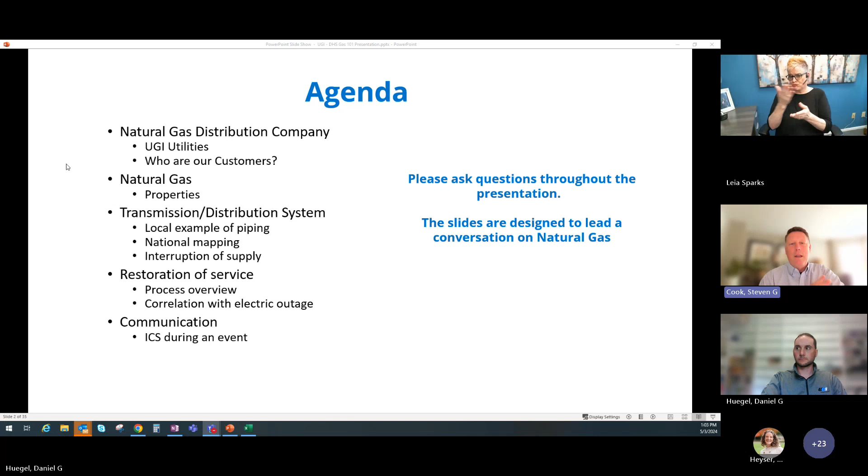Okay, so the agenda for today. Natural gas distribution company: who we are, UGI, and who our customers are. Some properties of natural gas, the basics. Dan will cover the transmission and distribution system, the restoration of gas service, an important part of it, and then, of course, communications during an event. So, Dan, if you wouldn't mind, thank you.

Over the past 3 years, natural gas utilities have added, on average, 750,000 customers annually. About 60%, maybe 61%, of U.S. homes use natural gas for some type of end use. That translates out to one new customer every minute across the United States, 80 businesses each day. At UGI, we add one customer every 45 minutes. Not quite every minute, but every 45 minutes, every day, 365. So again, we continue to add customers.

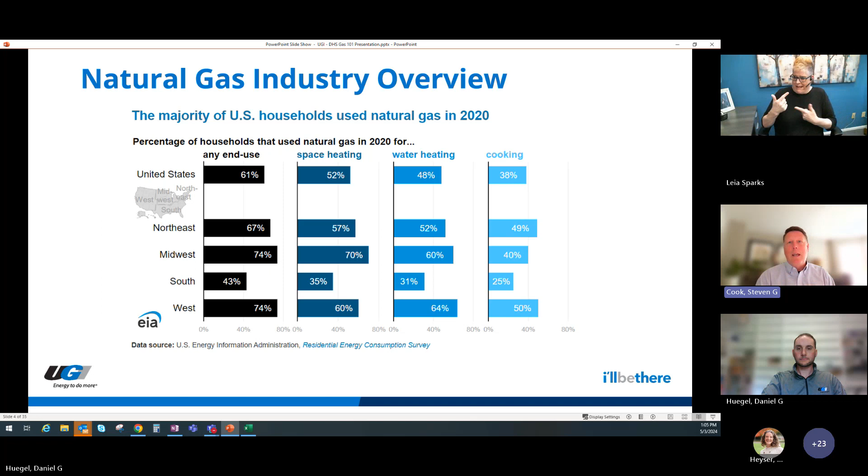Moving on. This gives you a general idea. This shows the majority of households use natural gas in 2020. What's interesting is it shows 61% of US households use natural gas. But remember, that's only where natural gas is available, and it's not available everywhere. Because we're not bottled like propane, or in a vessel like oil, or electricity, which serves everyone, where we are, we have even higher concentrations of natural gas. So in outage events, the majority of homes along our gas distribution systems use natural gas. All right, Dan, next slide.

So what I'm going to try not to do today is use a lot of acronyms. Okay. But I have to use one because this is something you'll hear fairly often.

It's NGDC, and that stands for Natural Gas Distribution Company. So in an event, you'll hear this, Derek, our friends at the PUC use this term a lot, and it really represents a state regulated natural gas utility, which owns the gas lines and equipment necessary to deliver natural gas. So when I say regulated, that means the Pennsylvania Public Utility Commission regulates us, UGI, as well as 20 other natural gas utilities in the state of Pennsylvania.

So they oversee us, they make sure we're doing all the proper things, and we report back into the Public Utility Commission. Now, what's also interesting is, oh, you got ahead of me, Dan. What's also interesting is that as an NGDC, we have specific service territories. So we apply for certificates of public convenience, which means we ask the Public Utility Commission, can we serve a municipality?

And why that's important is, while it's not always the case, it's predominantly the case, one natural gas company serves each municipality. So what you don't have is multiple gas lines running throughout an area. So in the case of an event, generally you're dealing with one natural gas company. If it's very large, it could cross territories, but the territory is well known. So you'll be working with one or multiple companies, but it's clearly defined. All right, next slide, Dan.

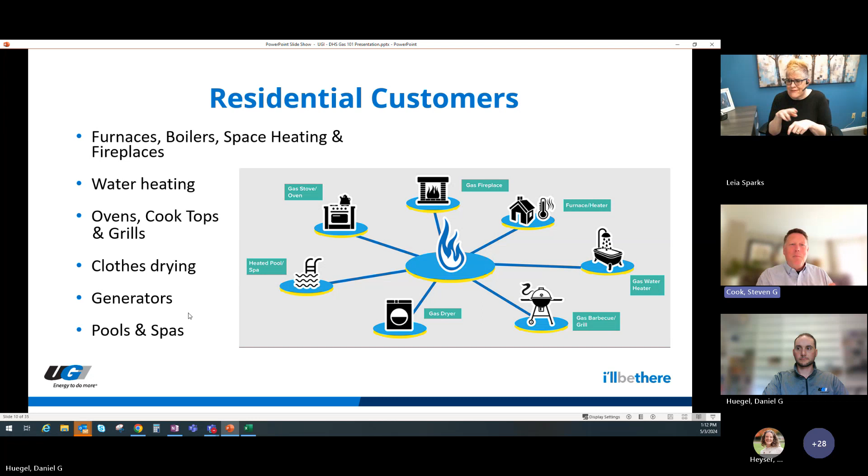I just want to bring that up to this group, that there's very few pieces of equipment that are just standalone. There are some pilot operated natural gas water heaters that are natural draft, but they're becoming less and less as we go along. So most equipment requires power.

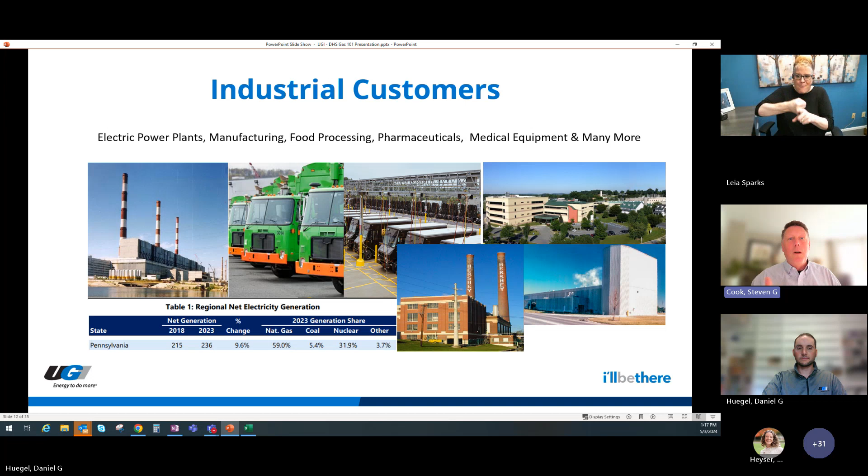All right, Dan. So, natural gas. Properties of natural gas. Tasteless. I'm not sure why you'd taste natural gas or why you'd taste gases, but anyway, it's tasteless and it's colorless, okay? It's actually odorless too. The distribution companies add an odorant to the gas.

It's called mercaptan, and it's what makes it smell like rotten eggs, and that's just so that the public can be aware if there's a gas leak; they can smell that sulfur or rotten egg kind of smell. Something else is natural gas is not toxic. What is concerning though is if there's enough natural gas in a room, it could displace oxygen.

So, sorry, someone's knocking at my door.

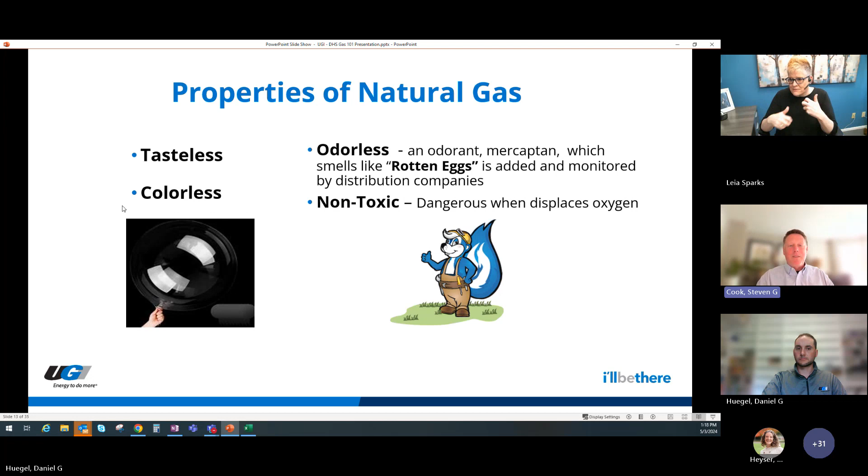So it displaces oxygen. So obviously that's a problem if it displaces too much oxygen. Now, another property of natural gas is specific gravity, and this is important to know. Natural gas is lighter than air, so it has a specific gravity of 0.6, which is really the ratio of a gas density to air. So when it's less than 1, it's lighter than air.

For example, propane, another gas that's oftentimes confused with natural gas, has a specific gravity of 1.6, which means it's more dense than air. So why I say that is natural gas rises, and when ventilating, we ventilate natural gas through natural methods, and what we do is use, help me out, Dan, I guess like fans and whatnot to displace or dilute propane from an area.

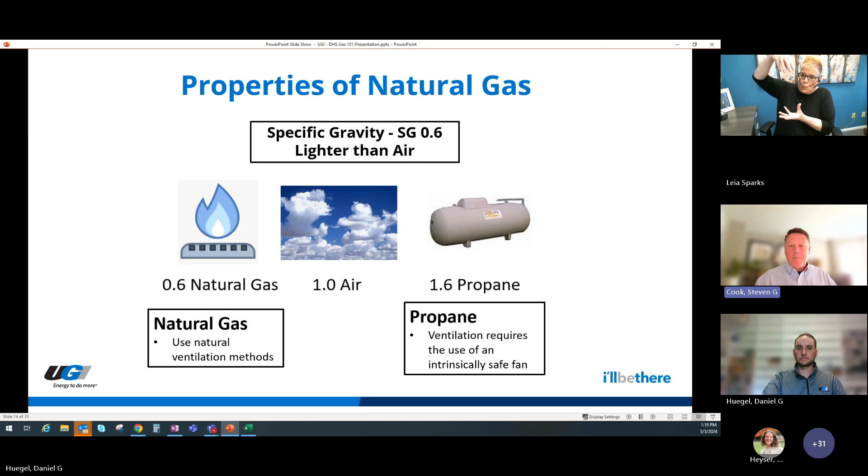All right, this is more the chemical composition of natural gas. The primary component of natural gas is methane, CH4. When properly combusted, the byproducts of combustion are carbon dioxide and water. Also, another property is it has an ignition temperature of roughly 1100 to 1200 degrees. So the source of ignition has to be fairly hot.

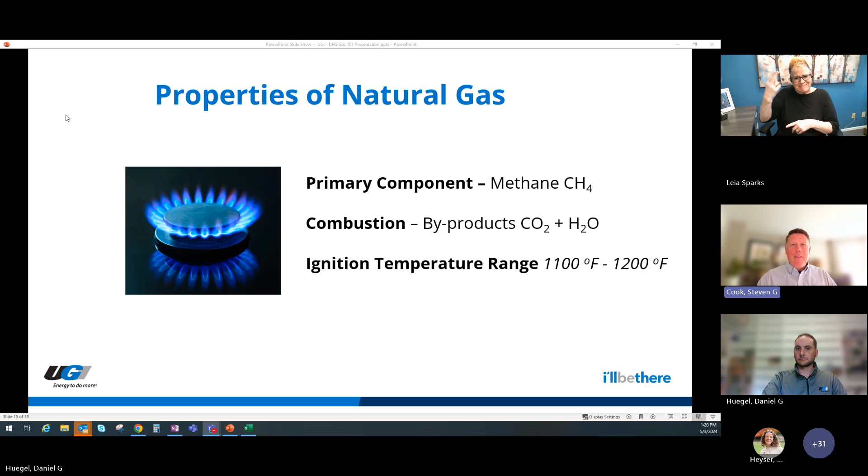Now, I say this, if we go on to the next slide here, because there's a very specific and narrow range in which natural gas will ignite. A lot of folks don't know this, okay? It's really about a 10% range. In fact, there are 3 components required for ignition: natural gas, oxygen, and a source of ignition.

So if it's too lean, which means less than 5% natural gas mixed in a room with air, natural gas won't ignite. Remember, you need to have between a 5 and 15% ratio of natural gas with air. You need to have air there, oxygen, and you need to have a source of ignition. Only when those 3 are together can you have ignition. Too much, above 15%, you won't have ignition. So again, hopefully you guys find that important.

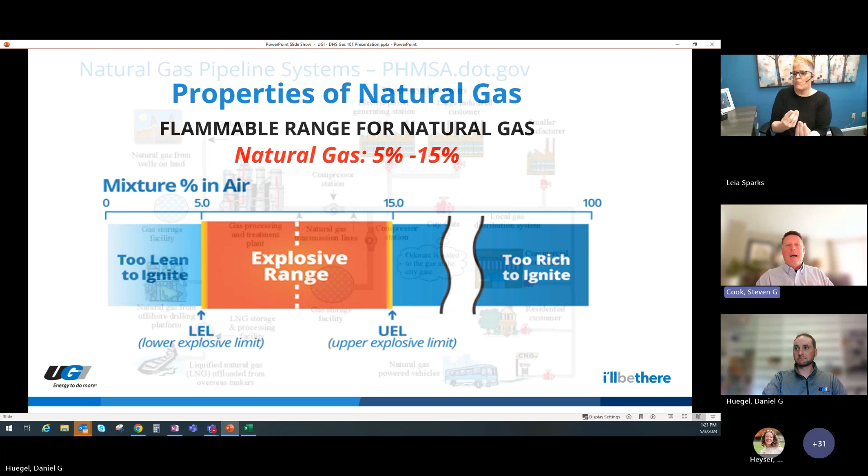That's why sometimes you've got your gas grill, and you try to light it, and it doesn't light because you don't have that right combination. Anyway, next slide. I think we're getting to Dan's slides now. So I'll turn it over to Dan.

Thanks, Steve. So I wanted to give an overview of natural gas pipeline systems, and I took this diagram from PHMSA, from the Department of Transportation, and the PUC acts on PHMSA's behalf to enforce the regulations. PHMSA shows this overall diagram of natural gas pipe systems. So we start on the left-hand side and we see where natural gas comes from.

Typically, it's derived from wells that are drilled down, maybe even a mile or 2 underground, and they bring up the natural gas. They can store it in storage facilities. They do some of the drilling for natural gas offshore. A lot of it comes from the Gulf of Mexico region.

And then they also can bring in liquefied natural gas. You can cool the gas till it goes into a liquid form, and they can ship it in tankers, or they have LNG storage facilities as well, big tanks that you may see along the highway, and they will be able to vaporize that gas and put it into the piping systems.

So typically they will process the natural gas when it's coming out of the ground, and they're pulling the different types of gases that are blended with it, like propane or butane, other heavy hydrocarbon type gases, till it gets to a pipeline quality natural gas. A lot of times what they will do is then compress the gas to get it at a higher pressure to be able to flow through the pipelines and supply the areas that are looking to be served with natural

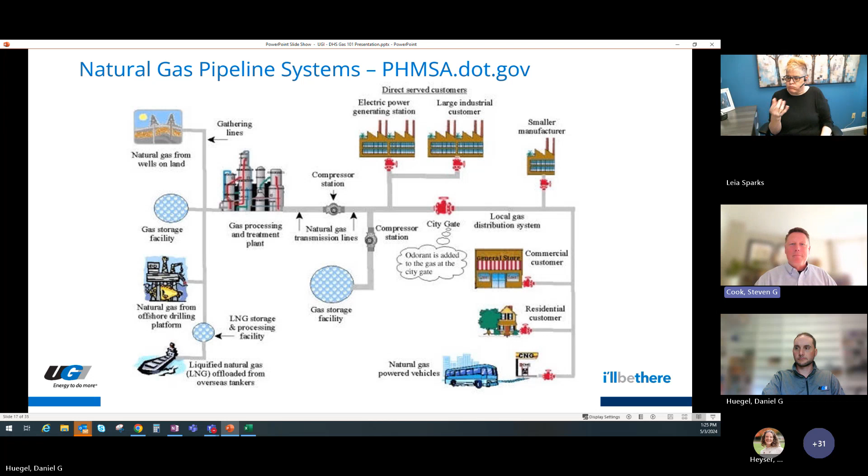Thanks, Steve. And so natural gas supply considerations. Again, this information will be available, but the point of this is system reliability. Many of the gas lines going across the country and locally, our distribution system has multiple points that it's connected to. And we do have some single one-way feeds that if you have a disruption on the pipeline, everybody downstream of that line is going to be affected.

You have other circumstances where you have multiple pipes coming into a network. So if you have a local disruption, it doesn't affect the rest of the distribution territory. You can backfeed it through other pipes and be able to maintain some reliability of supply. You may have a localized outage, you have to shut off some local valves to isolate a situation, but you don't lose the whole service territory.

Now, that's also dependent on the lines that are involved in an incident or outage. You may have somebody that digs in and hits a line and you have a gas emergency, or you have a leak where you have to shut the line down. In those circumstances, it could be just a local line that's going to a dead end cul-de-sac, and you may affect a handful of customers, or it could be a main trunk line, high pressure line that's affecting hundreds, if not

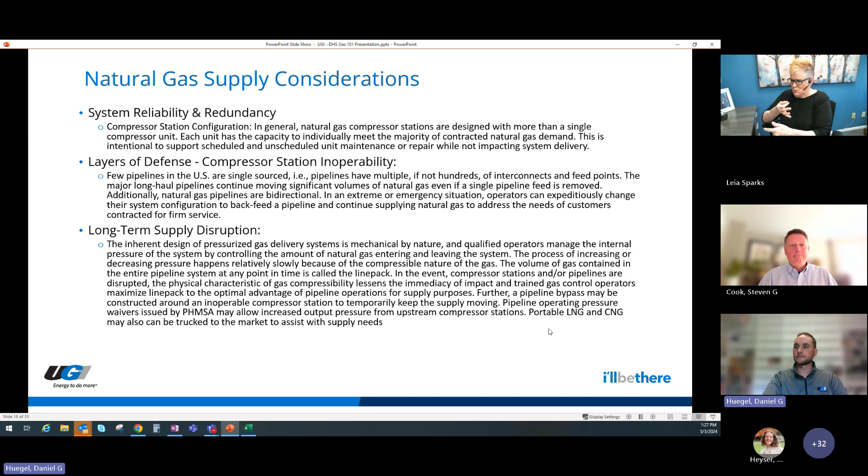So we break down the big picture view of gas facilities into kind of 3 categories. The first we'll get into is transmission and gathering pipelines. Then we'll talk about our distribution mains. Mains is a term we use for pipelines. And then customer service lines and meters.

So transmission facilities, these transport gas. Historically, most of the gas in the country came from the Gulf of Mexico region, Texas, Louisiana, big producers of natural gas. But many of you should be aware, especially in the last decade, of the Marcellus Shale. It's a rock formation, and it comes across a large part of Pennsylvania, and they found large deposits of gas. The drilling technology has advanced, and they could actually drill down 1 mile into the ground and harvest this gas. And most of the gas that we use regionally in the Northeast is supplied right from Pennsylvania, right from the Marcellus gas regions that we have.

So these transmission and gathering lines are gathering the gas from these different drill sites and wells, and they'll compress them. And then they go through what we call a transmission line. And there's transmission operators and companies that have interstate pipelines that go to the country and the city centers where we're at. These go up to typically maybe up to 1,440 pounds of pressure for natural gas.

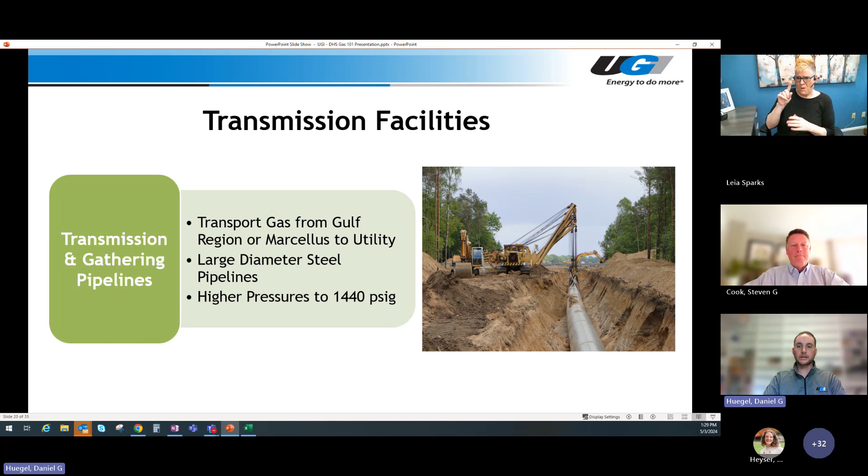There is a public national pipeline mapping system. The website is listed below here. And this is just an example. It actually goes by county, and you can select different variables on map layers to turn on. So an example here, we have up in the Stroudsburg, Mount Pocono area that we're showing, and we selected gas transmission lines or hazardous liquid pipelines. Those aren't ours, but they are part of this national mapping system. So you can see that there are some high pressure main trunk lines of gas transmission that traverse across the county here.

And again, this is public information. We're required as a utility to report annually on our transmission lines that we operate. But largely, it's the larger transmission companies that have the bulk of the high pressure transmission lines that go across the territory. So this should be a good resource if anybody's curious to use this, if you do have an outage and it's gas related, or you have LNG, liquefied natural gas plants, and some other interesting map layers that they have on this national pipeline mapping system.

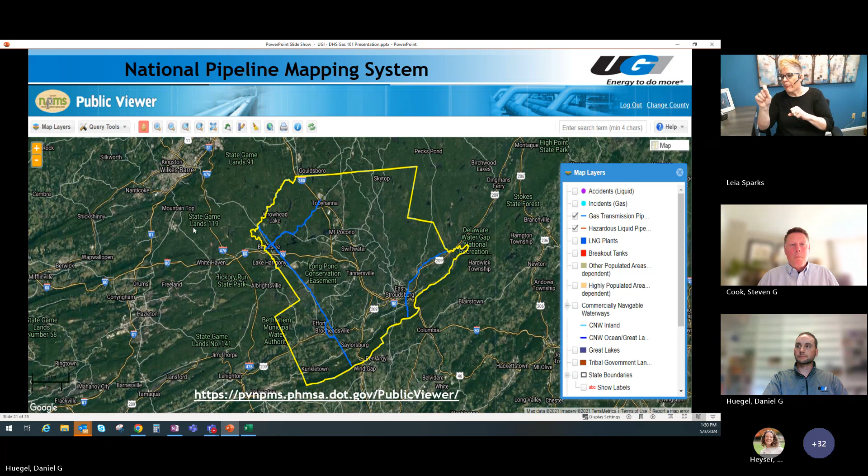All right, next, I mentioned earlier on the PHMSA diagram, the city gate stations. This is a pressure regulating station. It takes it down from those high pressure lines, and it puts it into a lower pressure that we use in our gas distribution. And it helps feed the main trunk lines that we have of our distribution system. So you may see these across the road, where you're driving, you'll see a bunch of pipes sticking out of the ground and other equipment. This is a heater that heats the gas up, because when you're reducing the pressure, it naturally cools the gas. And you have other equipment and monitoring equipment here. We meter the gas, so we'll purchase it from the transmission companies and then sell it to our customers.

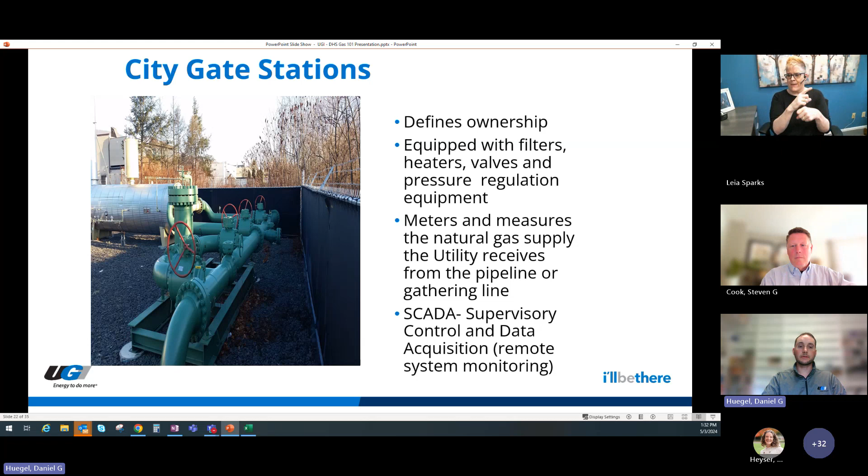So I wanted to highlight here, this is pretty complex piping systems, and there's valving and there's components here that we monitor. And if it is a large disruption on a transmission line and an outage, we're going to have to physically visit these stations and maybe manipulate some of the valves and monitor the pressures and do what we need to do to try to keep our system in play, or shut the system down and isolate it if we're going to be losing pressure.

Next, we have our distribution facilities. These are distribution mains and regulator stations. We distribute our gas across our service territory. Often they follow roadways, just local, state highways, all the way into neighborhoods. Our lines typically follow the roadways, but not always. Sometimes going from one territory to another. Steve showed that we have a pretty wide footprint, and a lot of our footprint is connected. So you may have cross-country lines going through kind of remote areas in right-of-way type situations.

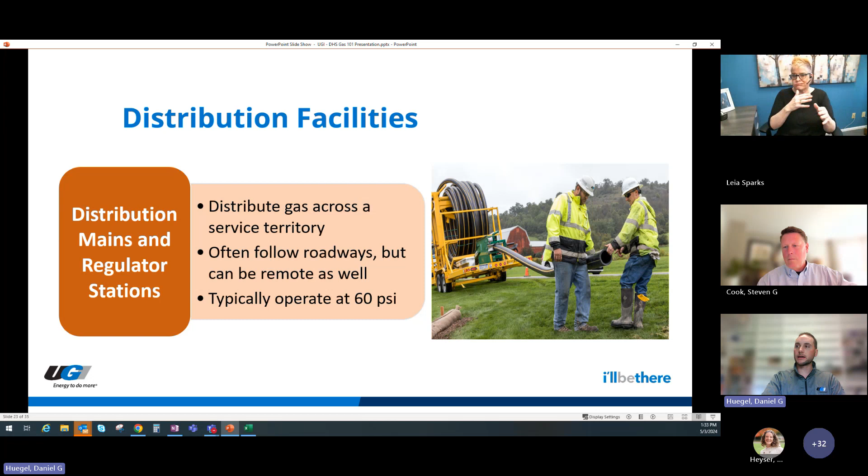But these lines are modern, made of plastic that we've been replacing. We typically operate UGI's distribution system around 60 pounds of pressure. And then that 60 pounds of pressure will go up to the house and then get regulated down again when we're talking about customer meters and facilities, which I'll get into next. So these are also pressure regulating stations here. These are certainly a lot smaller than the city gate station diagram that I showed. You may notice these in your travels as well.

These are actually regulators. These are mechanical devices that are spring loaded; you have a higher pressure coming into one side. It regulates the pressure down to a lower pressure on the outlet side, and that's the basics of it. And you have some relief valves too, so that if the pressure would build up, they would vent the gas to the atmosphere to prevent the downstream piping from being overpressurized. These could be located above ground. Typically, they could also be located below ground in pits. There's some of those as well across the service territory.

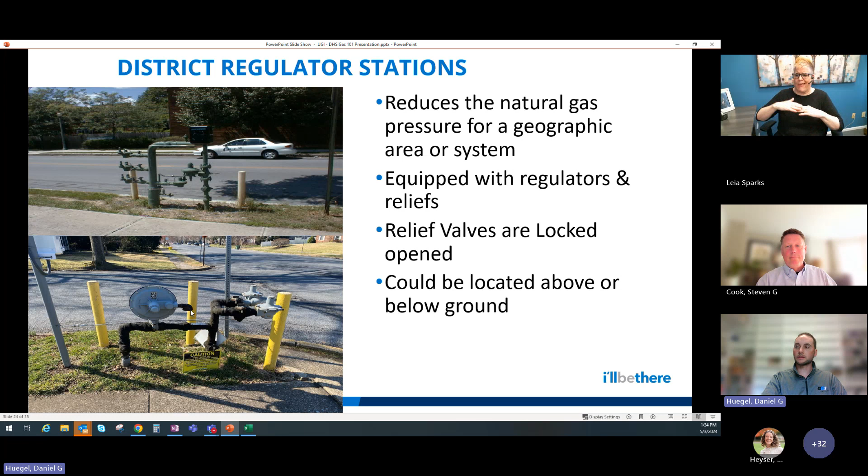And then finally, we have the gas service lines that go and serve the end users, our customers. So we have service to homes and businesses, as Steve covered before. It's a step down in pressure. Typically, it's going from 60 pounds down to, this is actually 7 inches of water column. It's a measurement of pressure that we use. It's equivalent to 1/4 pound of pressure, basically. And that's what your appliances will typically use in a residential application, your furnaces and stoves and water heaters.

Some commercial and industrial customers take higher pressure for sure to operate their equipment. Maybe 60 pounds, maybe 100 pounds, depending on the application. Certainly large electric generation facilities and other manufacturing industrial customers will take higher pressure to operate their industrial equipment.

So just a little more on what a gas service line actually is. This is kind of a cross-section view a little bit. You can see a car on the roadway here. This circle is actually a gas main that is paralleling the roadway. And what we do is we connect to that gas main, and we run an underground service line to a property, and then we come up above ground to a meter. From that meter, it's typically regulated down to that 7 inches of water column or quarter pound of pressure.

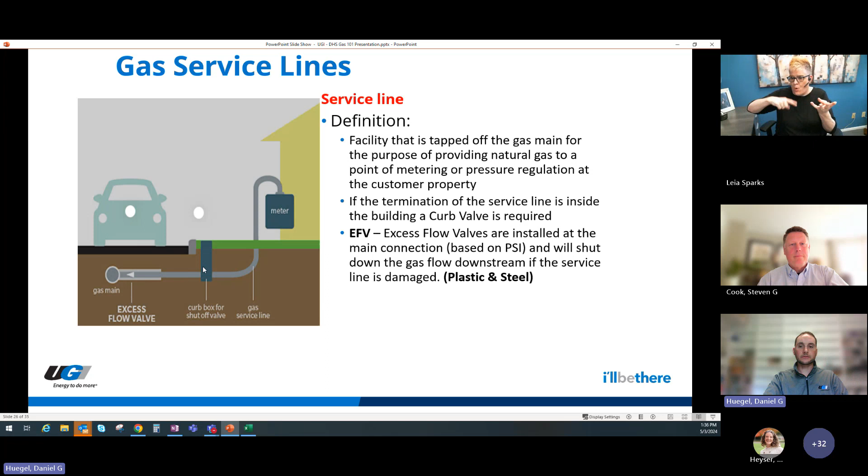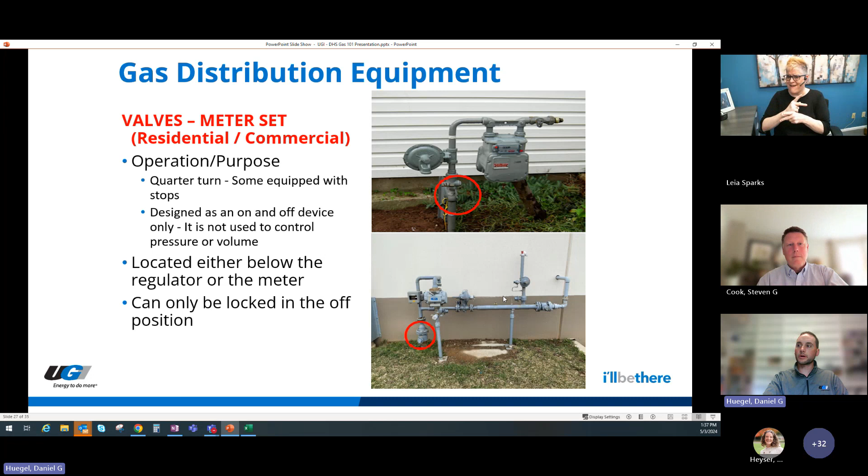So these are a couple pictures of meter sets, residential or commercial. These are different types of meters. This is probably a typical meter you may see if you have natural gas at your house. You're used to seeing. Here's a regulator, so the gas is coming up out of the ground. There's a couple valves here, and it takes the pressure down, goes through the meter, and then on the outlet would go into the house to the appliances. This picture below here is a larger, different style of meter set with a little more piping and equipment for more of a commercial application.

And then here's another meter installation. This is actually on a low pressure system. It doesn't need a regulator because we regulate the entire mains down to a quarter pound of pressure. And it is just metering the gas, and then the outlet of the meter. There's some valves here that could isolate the customer side, and this would be a fuel line going to a customer's equipment.

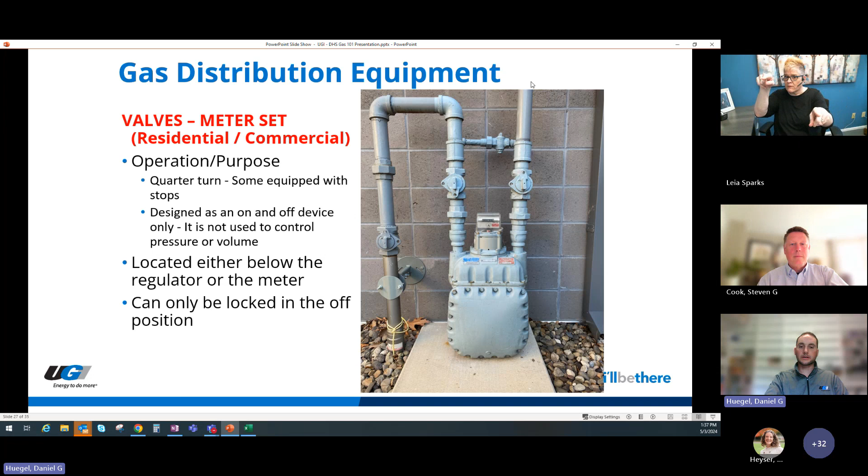Okay, so I want to talk about what happens actually if we have a natural gas outage, and what we have to do, our restoration procedures to restore gas to our customers. Very different than an electric outage. We're all used to thunderstorms coming through, knocking down trees that'll take out a power line, and you'll be out of power for a little bit of time. And when the electric company repairs the line, then your power comes right back on and you're good to go. Unfortunately, it's not that easy on the natural gas side.

So typically what happens when there's a natural gas outage, we work as a utility to identify the scope of our outage and verify the customers and non-customers. Steve mentioned it's a hydraulic system. We have computer software that models the flow of our entire natural gas distribution system with all the pipes in it and simulates the usage and where the flow may be.

So we know if, let's say somebody digs and hits a line and we have to shut it down, we can then tell how many customers are affected and how many valves we have to shut down to isolate that system. So we do a lot of that verification up front, try to identify the scope of the outage.

We have our call centers, our customers are calling in and saying, hey, my furnace isn't working anymore, or the gas doesn't seem to be on. And we try to target those as well and communicate back to our customer base through a variety of media channels. We email and text, and we have other communication ways, public service announcements, to get in contact with our customers and notify them of an outage with those communications.